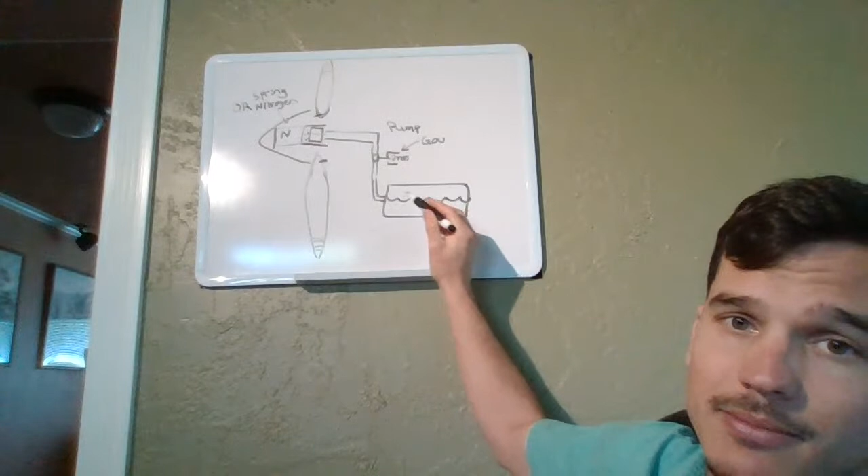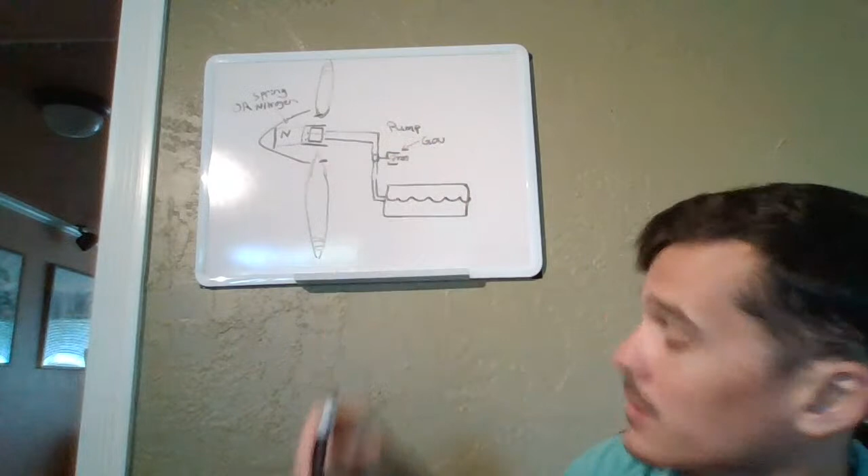So same thing, right? You've got an oil sump, oil's flowing up through here. You've got a pilot valve here that's controlled by your governor, which regulates the amount of oil going to your hub or away from your hub. And you've got a pump as well to boost the oil pressure to make the pressure strong enough to change the pitch in the blades.

Same thing as you're used to on the single engine, but in the multi-engine, the oil pressure is used to drive the blades to a finer pitch or a higher RPM setting, instead of the high pitch setting that the single engine constant speed propellers are doing.

So why does multi-engine do that? Why does it work kind of opposite to a single engine? It's because when we're talking about multi-engine, it's all about how you handle the drag and kind of adverse control effects of when you lose an engine, or if you lose an engine, how you're going to deal with that.

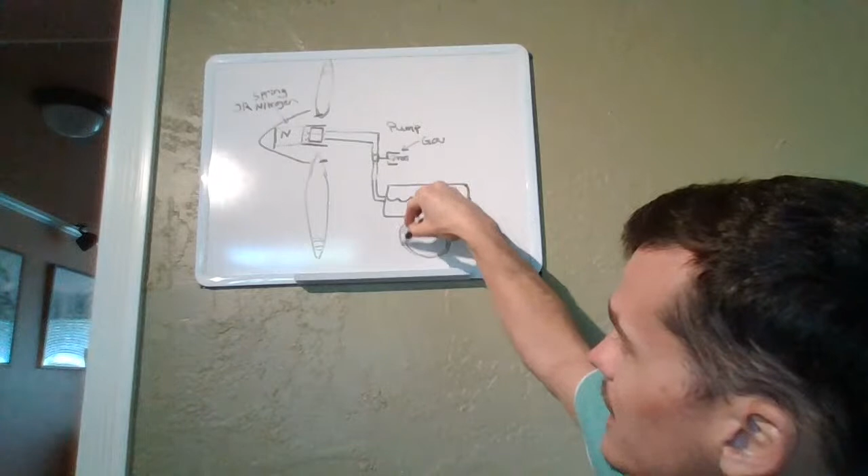And the multi-engine constant speed propeller helps you out with that, because if you lose the engine in a single engine, your prop will just keep windmilling here, right? It'll be this big old drag disc. When you lose oil pressure, it goes to a fine pitch or high RPM position.

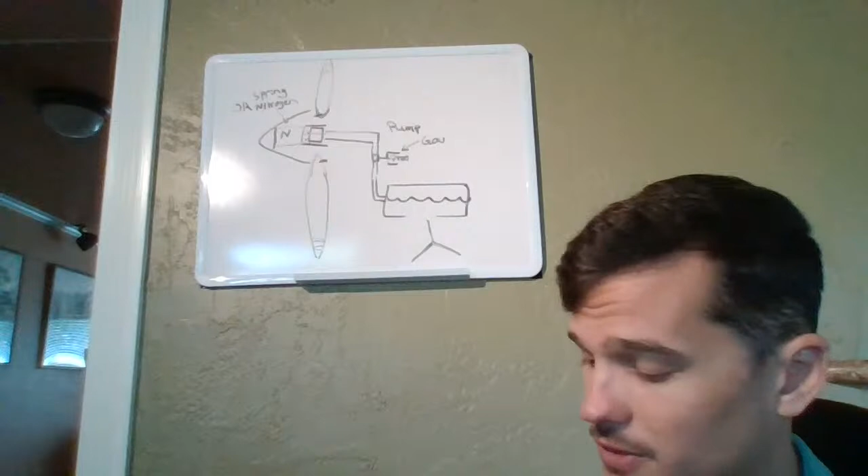In a multi-engine, it goes to a high pitch or low RPM, right? So it cuts down on that drag. And ideally, when you lose an engine or you demonstrate losing an engine, instead of having that big disc, you're just going to have these 3 blades right here, 2 blades, whatever you're flying. That's a lot less drag as opposed to a big spinning disc.

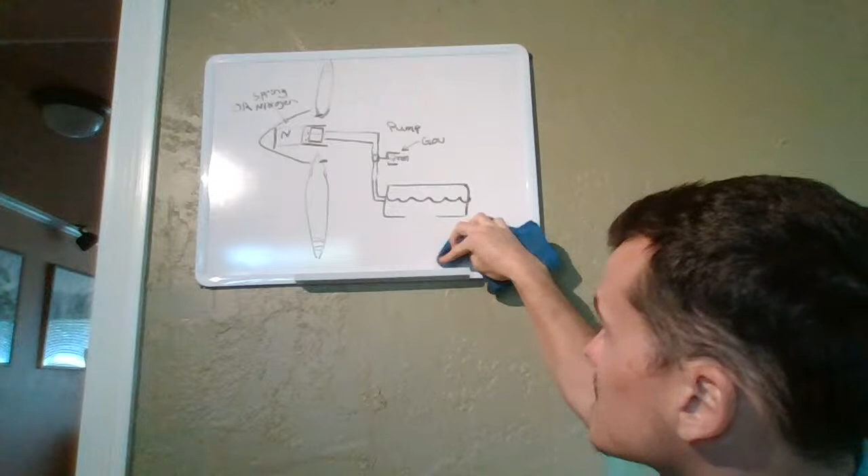And it really helps you maintain control of the aircraft and lets you get better climb performance if you can climb where you're at, or less descent perhaps. Maybe you'll just have a lower descent speed when you feather that propeller.

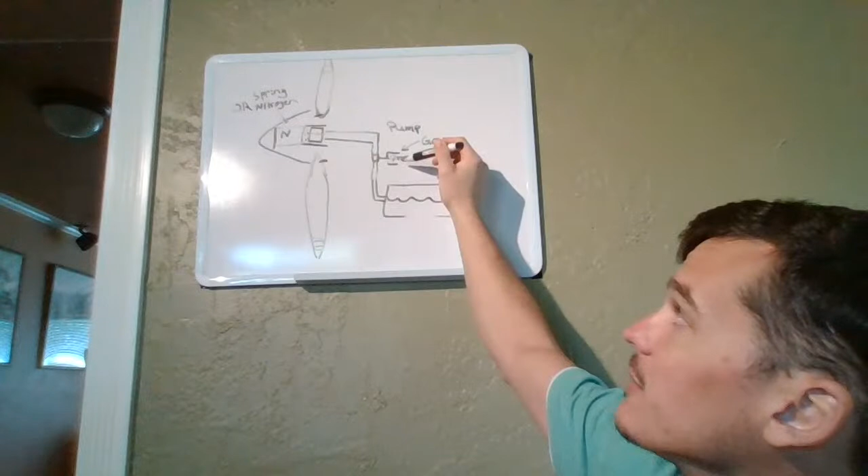So the multi-engine, same thing, right? We've got our oil flowing up through here into the hub. We've got our governor. In the multi-engine, when you want to go to a fine pitch, you'll have more oil pressure in here. It'll come into your hub, drive your blades to a fine pitch RPM position.

And when you lose that oil pressure, let's say you lose the engine, the additional part you're going to have here in the multi-engine - mine specifically, I've got this N, it looks backwards here, but this is an N for nitrogen. My propeller dome is pressurized with nitrogen.

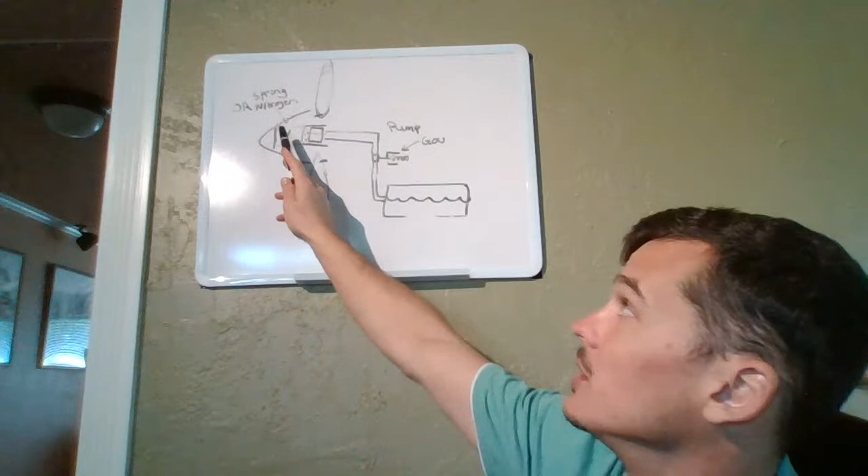So if I lose oil pressure, that nitrogen will drive the blades to a coarse pitch or low RPM position, and that will reduce the drag, right? It'll cut down on your windmilling propeller.

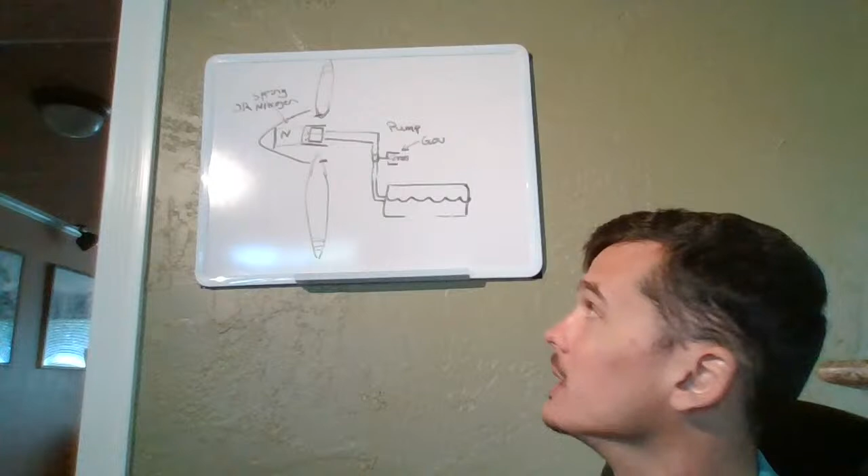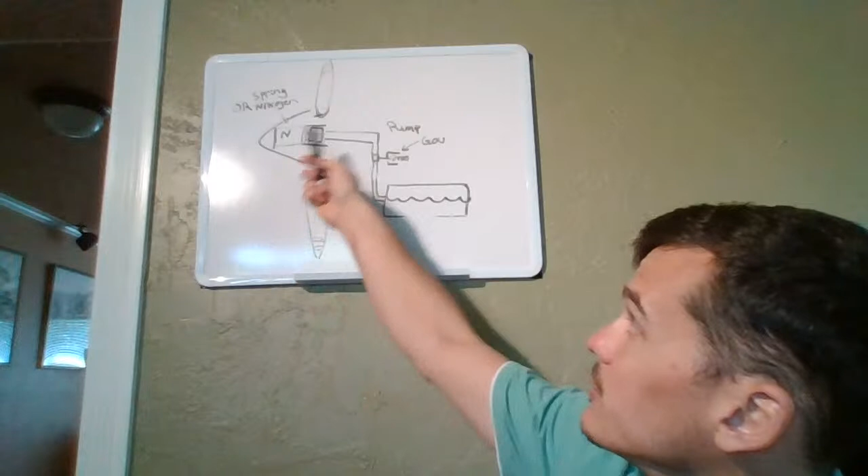And then part of your job to help that propeller out is to pull your control lever to the feather position, and that'll allow all the oil to flow out of there and for your nitrogen to drive it into a feathered position. Feathered meaning your blades are really coarse.

Instead of your blades being at this angle, when they're feathered, they're more like that, so the wind can flow easily over that. This is a lot bigger drag surface with the windmilling of the propeller. That's the additional part you'll have here in your multi-engine.

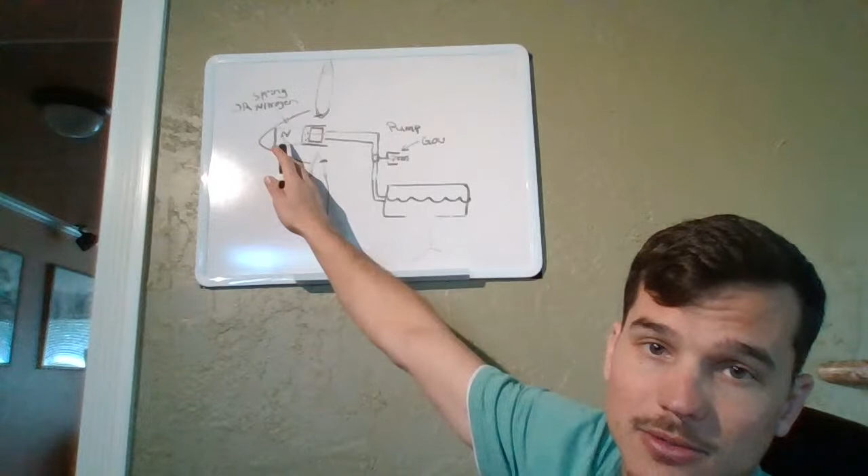A lot of them have springs, a really high tension spring to push that piston and drive it into the low RPM position. My aircraft has nitrogen in it. Piper 34 Seneca, PA34-200, has nitrogen to drive those blades towards the coarse pitch or feathered position.

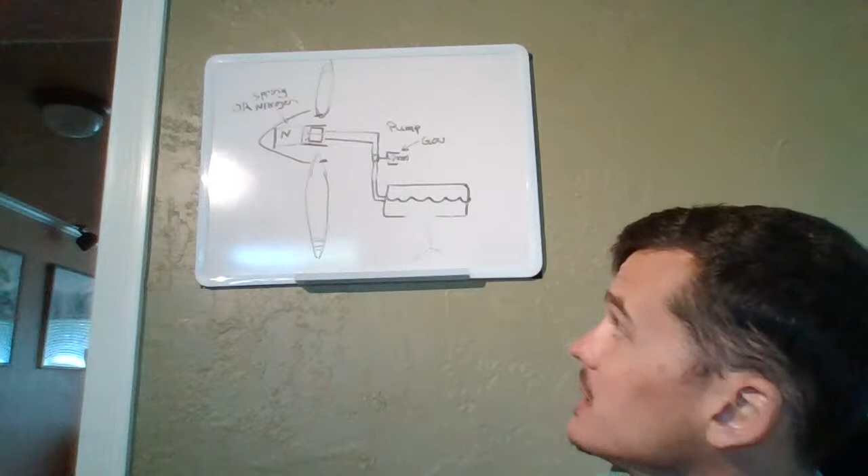Another additional thing to think about when you're talking about multi-engines is these little locks.

I wasn't prepared enough. There we go. All right, we got life.

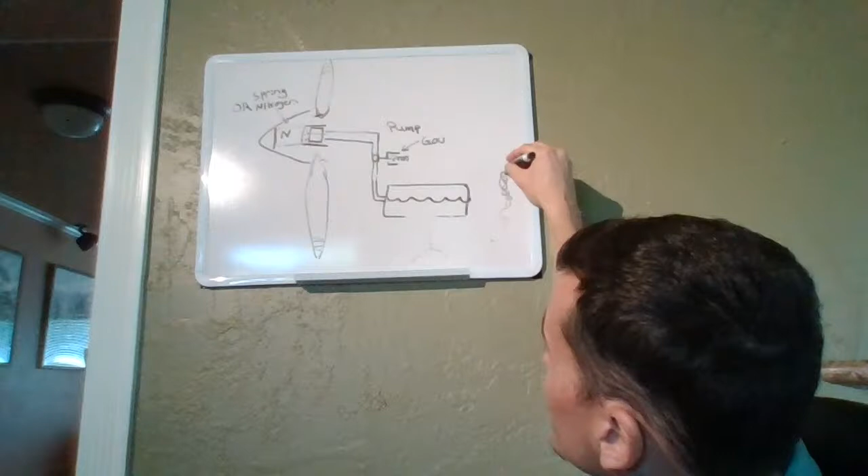So there's these little locks inside, right at your blades, that will keep it from feathering in an intentional engine shutdown. Like when you shut down the engine, you're done flying for the day, you taxi to your parking spot, you shut down the engine. There's no oil pressure.

But the manufacturer designs it with these little pins in place to keep the blade from feathering completely, because when you start up the engine with the propellers feathered, it creates a lot of extra vibration. It's kind of imbalanced with a lot of vibration.

So they put these pins in place so when you actually shut down your engine and don't pull the prop control lever to the feather position, they'll just go to a certain blade pitch angle that the manufacturer likes for engine startup.

Oh, pardon me. Hope you have your masks on.

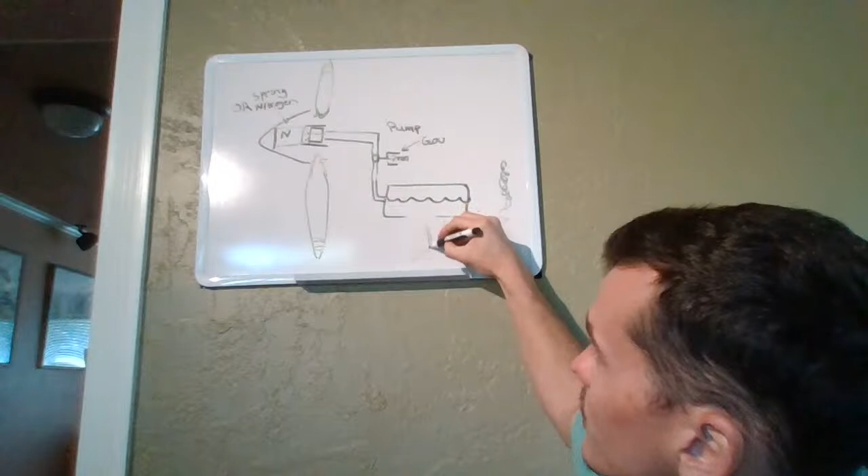And so why does that matter to us? When we actually have an engine failure in flight, we want the blades to be feathered, so we can have that high pitch, or coarse pitch, low drag position. We want those blades to stop spinning - we don't want them windmilling, creating a lot of drag on that dead engine.

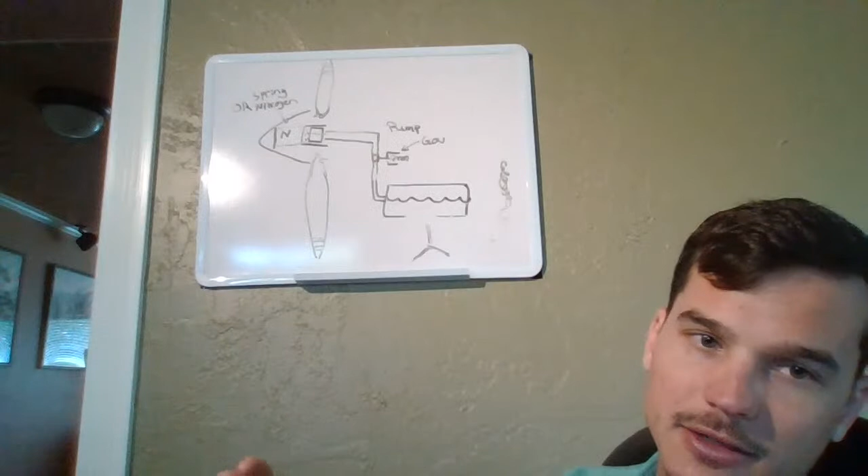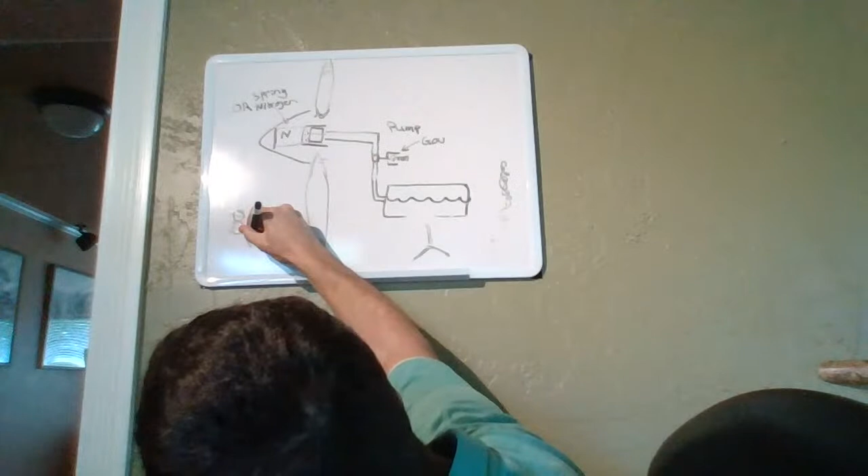So it's our job to help that propeller get to the feather position before the RPM decays to 800 RPM. That's the big number according to the Airplane Flying Handbook, and it's also in my Seneca manual - 800 RPM. You need to feather that propeller before you get to 800 RPM, or else these little centrifugal downlocks will slide into place and keep you from feathering the propeller.

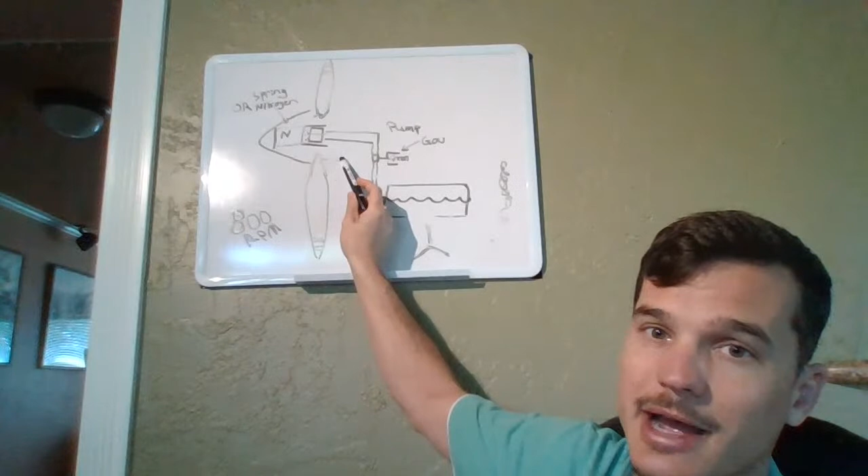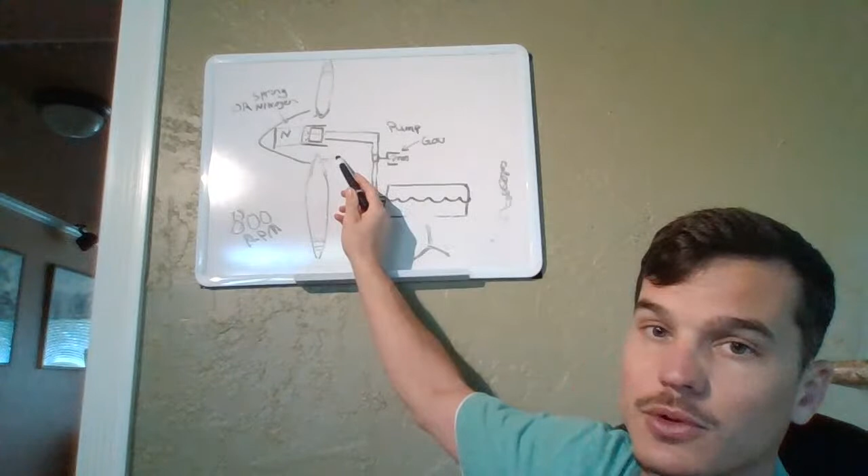When your engine RPM is above 800, these little propeller locks are out due to centrifugal force. The high RPM slings these little locks outwards, so when you pull that propeller to the feather position, it will be allowed to feather. If you let it decay below 800 RPM, the centrifugal force is a lot lower, and those little locks slide into place and will prevent you from feathering your engine.

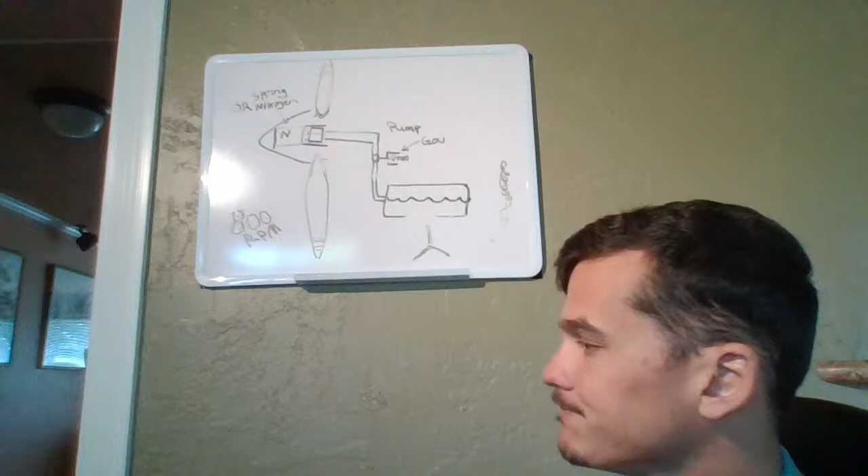And that's not good, because you need to feather that engine, or else you're going to be creating a lot of extra drag, making it a lot harder on yourself, and increasing your VMC speed.

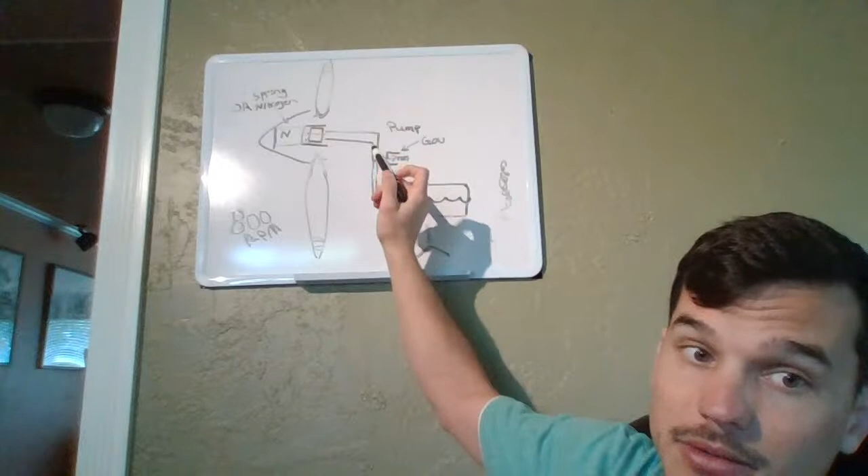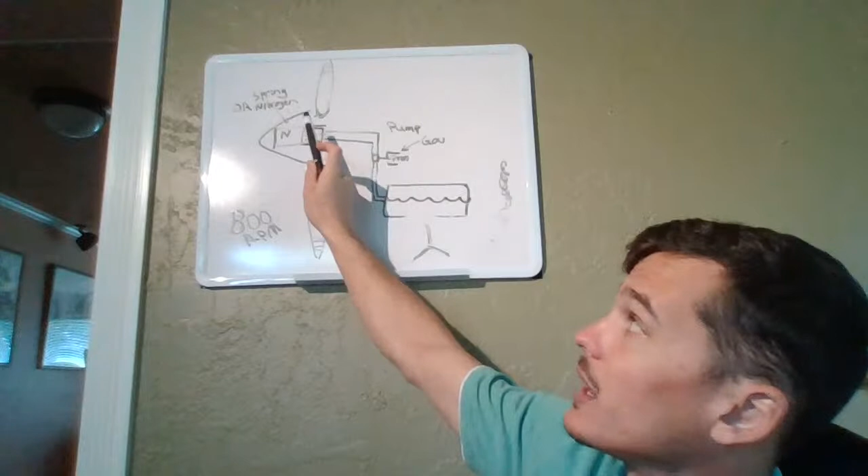So that's pretty much all I have for you. It works the same way, except just a little opposite - the exact opposite of what your single engine is going to do. Oil pressure drives the blades to a fine pitch, and when you lose your oil pressure, that nitrogen or spring force is going to drive your blades to a coarse pitch. You need to feather it before you get to 800 RPM, and that's about all you need to know.